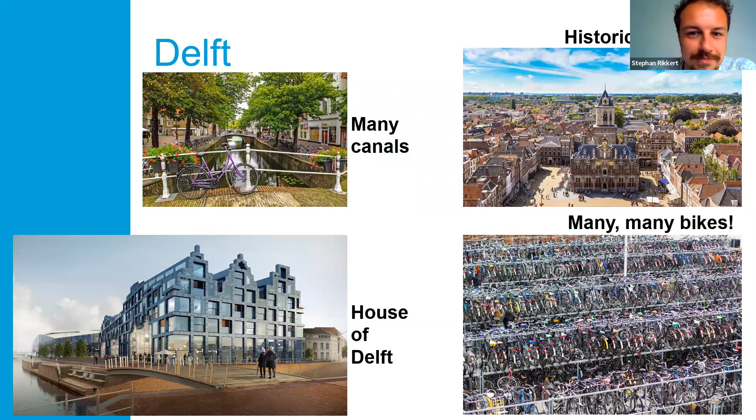But some more serious things - TU Delft has some main objectives: providing scientific education, conducting scientific research, transferring knowledge to society, and promoting social responsibility. In all these things, it tries to make an impact for a better society.

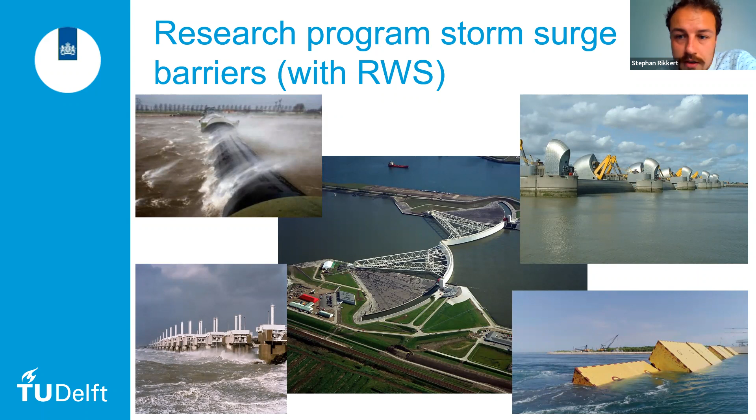So first, the storm surge barriers. My colleague Leslie Mooyaart is doing a PhD on storm surge barriers. Here you see some very interesting barriers. The one on the top left is an inflatable barrier. You see the Maeslantkering in the middle, the Thames barrier, barriers in Venice, and the Oosterschelde barrier.

And within the program, there are many research topics: the effects of climate change on storm surge barriers, adaptability of barriers, maintenance and optimization, and knowledge management of storm surge barriers. My colleague Leslie Mooyaart is working on this, so if you want more information about this research program, you should contact him.

But at the same time, after these floodings happened, many researchers and experts put their heads together and thought: well, this is something that doesn't happen very often, and we should see what information we can collect as fast as possible to figure out what has happened and describe that as well as possible, but also to learn from it and make sure it doesn't happen in the future again, or at least minimize the consequences of flooding.

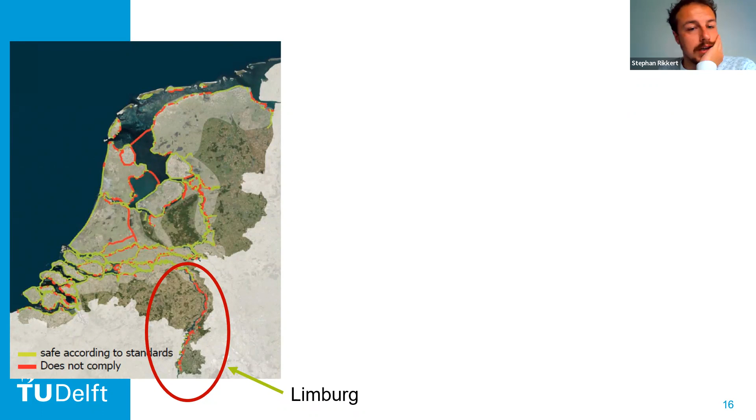For the people who don't know Limburg, Limburg is a province in the south of the Netherlands - you can see it here. Normally it's a very nice area, hilly, and in this picture also very green. Especially for Dutch people, it's almost mountainous. It also has the highest point in the Netherlands, which is 322 meters - that's a quick fun fact.

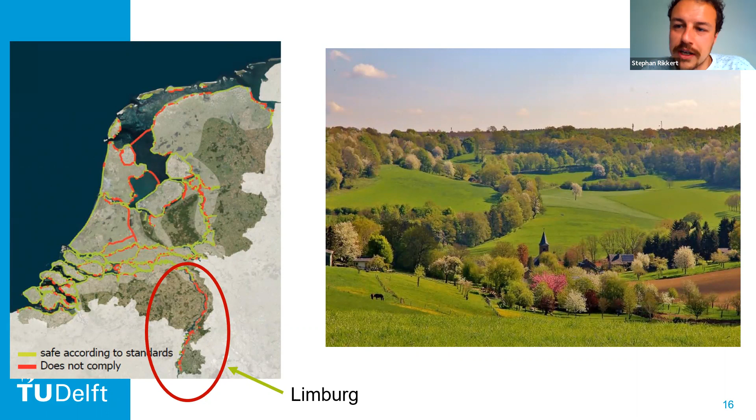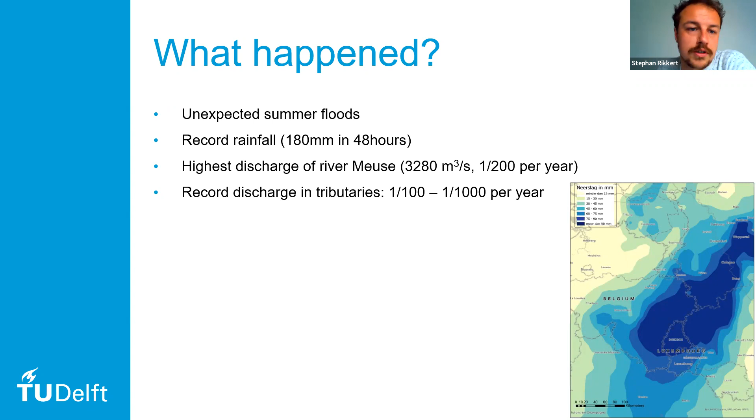But these hills also have a downside, and that's when it rains really hard - that's what happened last year. The flooding occurred during the summer, which was a bit unexpected because we have a storm season starting in October that ends somewhere at the beginning of the year. But the floodings happened during the summer, caused by record rainfall of about 180 millimeters in 48 hours. This resulted in the highest discharge of the River Meuse ever recorded, and also record discharges in tributaries.

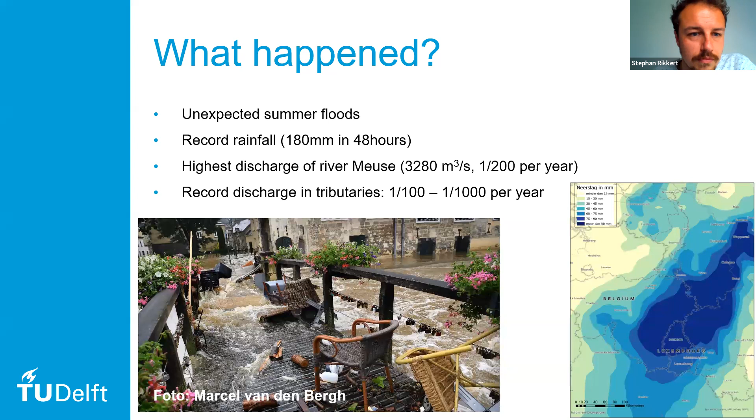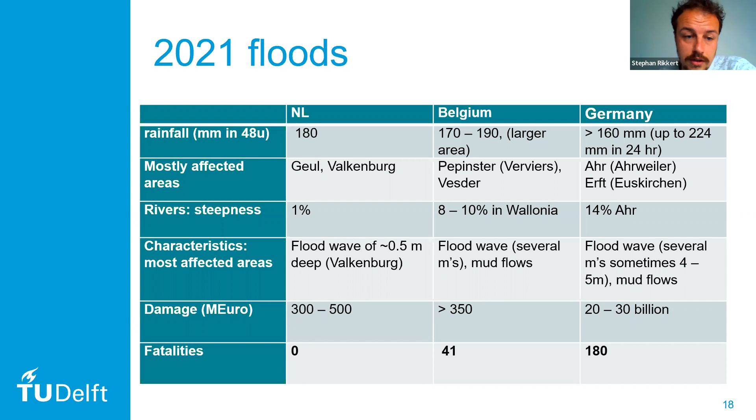Here's an overview of what happened. So we did not only have floodings in the Netherlands, but also in Belgium and Germany. Belgium and Germany have been hit harder, I think, for a couple of reasons: the area over which this rainfall fell was larger, but also the area is steeper, which results in faster runoff of rainfall and bigger floods. So we did damage estimations, and because of the bigger flooding in Belgium and Germany, you can also see that the damage and especially the fatalities are much higher.

One of the important tasks of this fact-finding mission was to collect the data that was out there, write down what happened, and also write down the lessons learned, to learn from it.

Some of the important lessons are that you should be prepared for the unexpected. We should improve our flood warning systems, and also, because now we experience some extreme statistics in river floods, we have to re-evaluate the likelihood and river system performance. Also, some of the tributaries did not really have protection levels or dikes. We have to think about how we can reduce the flood risk there, and if we maybe have to increase our design and build dikes there.

So now follow-up research is needed. International collaboration is required because the river doesn't start at the border, but flows over the borders. I think there's, after the summer, also an Interreg project starting on this topic with partners from Belgium, Germany, and the Netherlands, and TU Delft is also involved.

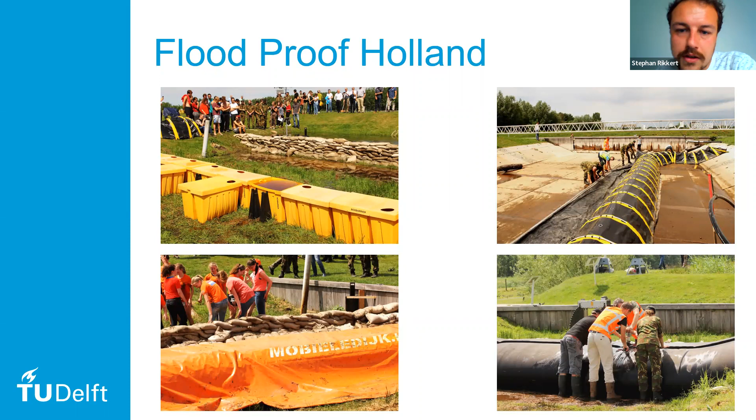Okay, so this is Flood-Proof Holland. Mario is now there building a new dike. We have different basins. At the moment he's working in the large basin where he will figure out the effect of foreshore on breach growth.

Currently a sandy dike is built, and there will be a clay layer on top. Then a breach is initiated and the basin that is filled will flow through the breach into the empty basin, and we are measuring how fast this breach is growing. To get water back into the basin and keep the circulation going, there are also some pumps being installed at the moment.

In the small basin, after the summer, Mario will do some more tests. These tests focus on how the foreshore erodes with a fixed breach width. The dike that you see here is made out of wood and is a fixed structure, so that one only focuses on the foreshore.

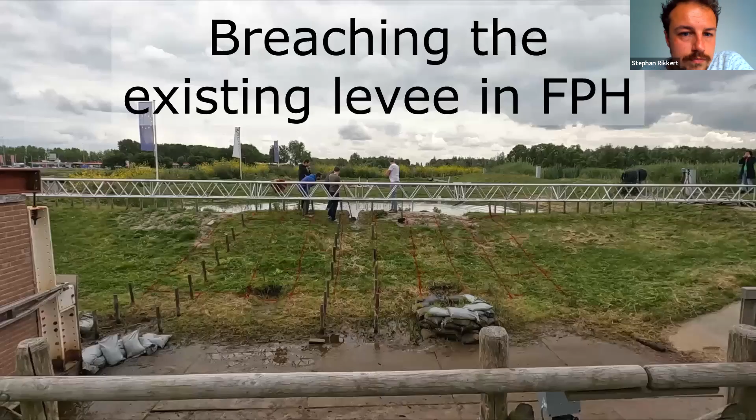So like I said, Mario is working already really hard in the polder, and we organize an event on the 27th. So I have a video here as a sort of a teaser.

There was an old dike. That's also the dike where our other PhDs performed their tests on: the piping experiment, you see here the remainders of this piping experiment test, and also the BresDefender test. Mario needed a new dike, so this existing dike could be breached. That's what you'll see in this video. I hope it works.

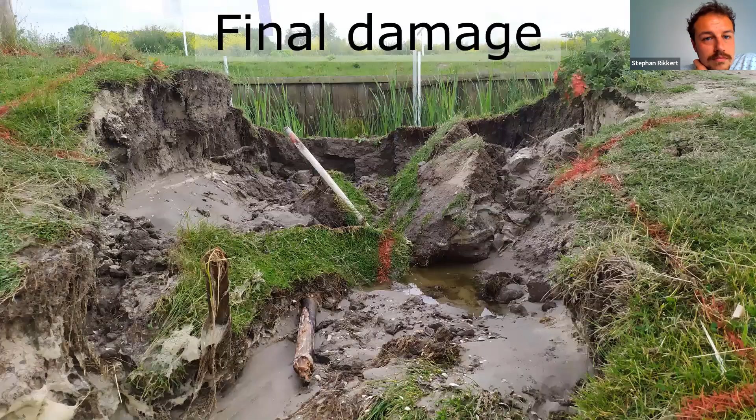Okay, so that was the teaser. I've also come to an end of my presentation. So I hope you like the teaser, and I hope you will also join on the 27th.

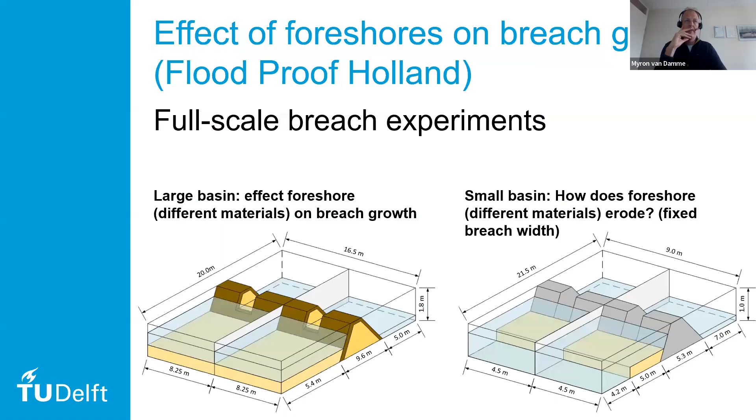So I think for now we have used Verheij-van der Knaap. And this project is finished or is still ongoing? No, it's still ongoing. That would be nice to see what is the impact of different model choices you make here. But yeah. Okay, thanks. You're welcome.

I believe this Verheij-van der Knaap breach growth model is based on some historical breach events and is the default breach growth model within SOBEK. And SOBEK 1D or 2D is the default software for modeling floods in the Netherlands. If I'm missing things there, please correct me. Okay, any other question for Stephan on the TU Delft?

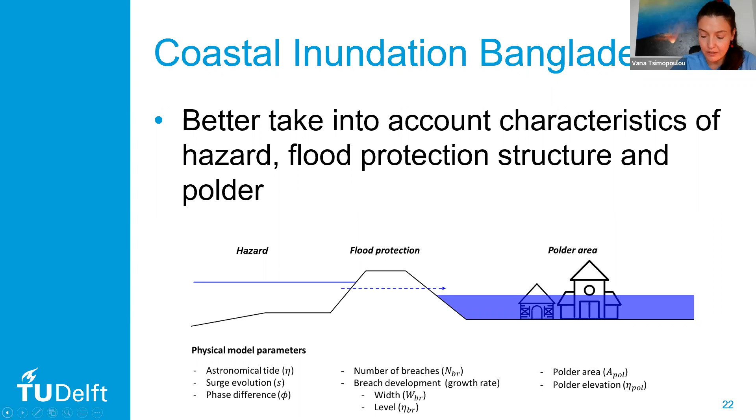I had a little question about the assumptions and the approach you use for, let's say, the inundation. You had this bathtub approach. I was intrigued because you said that it overestimates the damages, which makes sense, but it also seems that it underestimates the probability, isn't it right? Because it assumes that you get inundation when the crest level has been reached. Yeah, that's true. It doesn't really take into account probability of failure, so it's difficult to determine a probability of flooding. Okay, thanks.

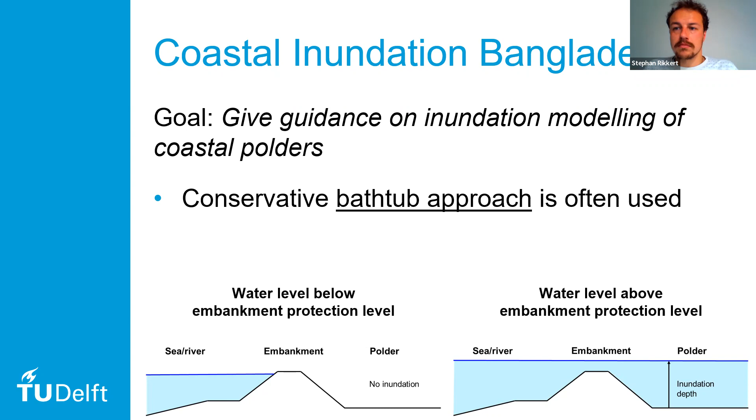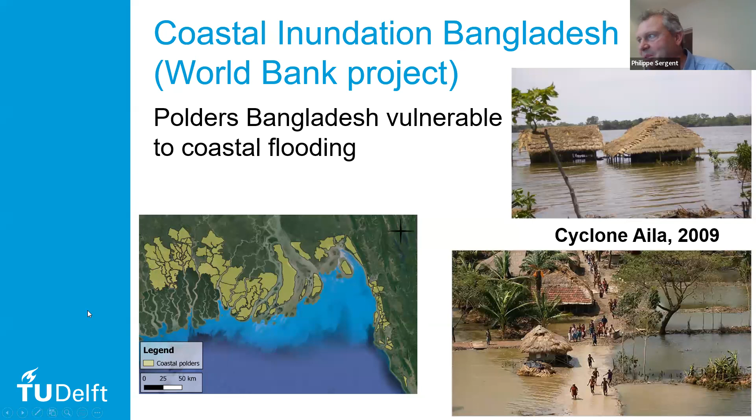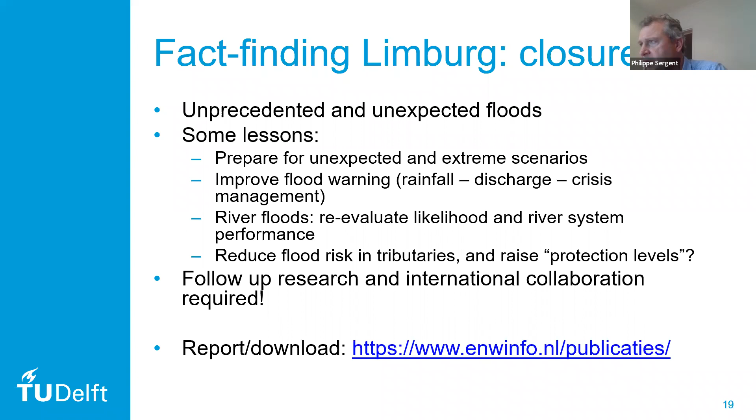And Philippe, you have a question? Yes, thank you, Stephan, for your presentation. That was very interesting. I was in particular interested in the foreshores, because if you come for the visit in Bay of Somme, we have a very large foreshore in front of the dikes. So I was wondering what you were studying - do you study overtopping, or do you have waves, or is it just overflow for foreshores? Yeah, for foreshore, yes.

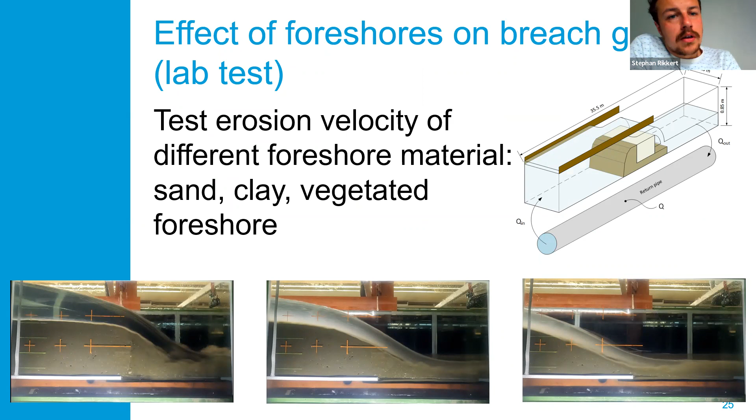No, it's mainly the effect of foreshores during a breach. Do you have waves included or not? No, we look at the moment after the breach initiates, so it's not about wave overtopping or waves. The experiments start at the moment that the levee is already failing.

Okay. Yeah, so for sure it's very important, it has an important impact on waves also. But that's true. Philippe, maybe to get the overall picture, many other people have already studied the effect of vegetation on the wave propagation and the waves hitting the levee, and there's a huge effect of this vegetation in minimizing the wave forces. We've also, Mario did some studies on the strength of this foreshore, whether we can rely on it to stay there during a storm, following overflow or waves running over it. And there the answer is more or less positive, that a foreshore is not so easily eroded. And now the effect of the presence of a foreshore on the final breach width is one of the questions. And we hope, or Mario hopes, that it minimizes the overall width, and as a consequence, the risk or the hazard or the impact of it. Okay, thank you.